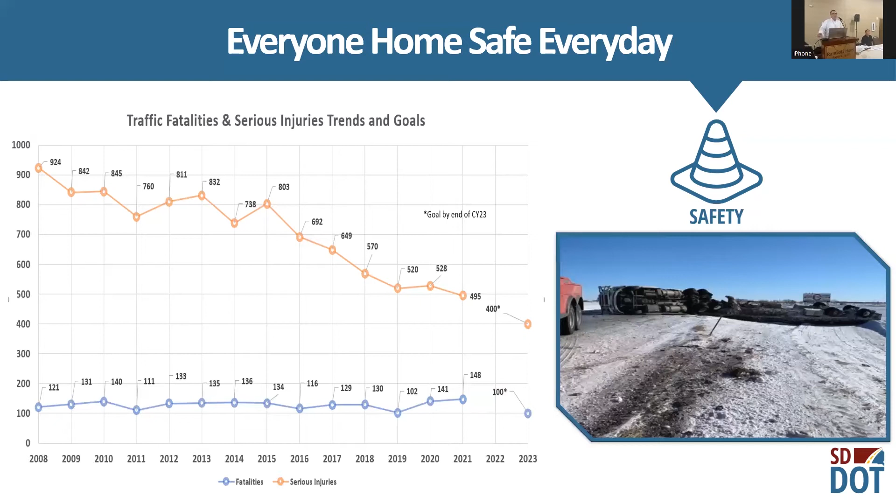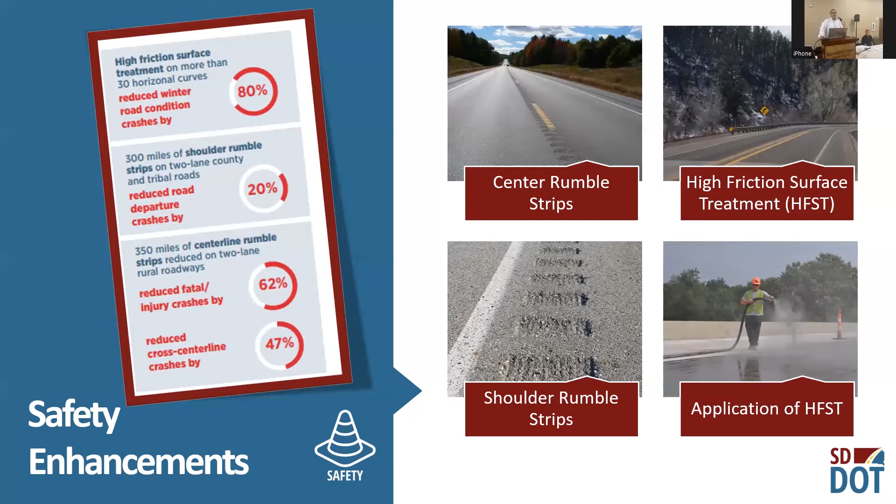We have 2 seasons in South Dakota, right? We have road construction and we have winter, and that's essentially what we're dealing with. So during those winter times, what's a tool that we can use to make sure we're getting to our destination safely? I sincerely hope you're using the 511 app. We can also use it for construction. As you use that app, you can plan for that trip. You know the construction's coming up, and you can actually plan for how long you may be delayed. Again, a great opportunity for you to engage and ensure you're getting your family or yourself there safely.

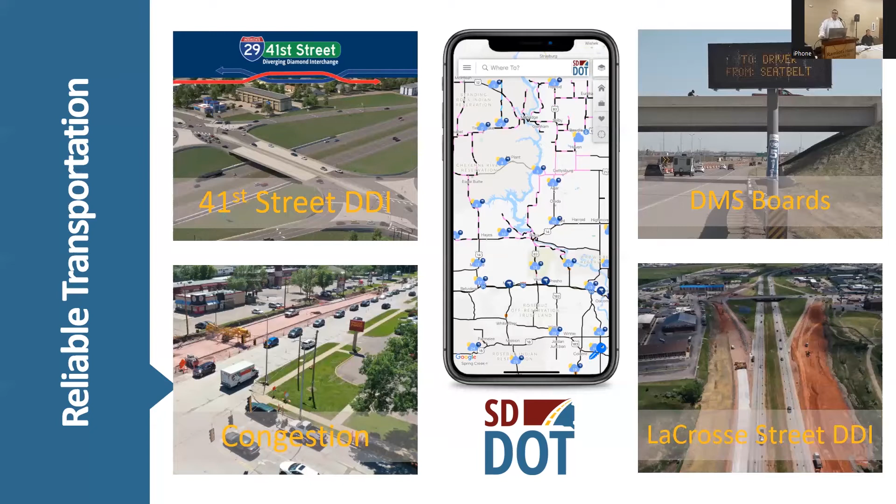The Transportation Commission since 2015 has adopted the Bridge Improvement Grant Program. So for those of you with a county or city government, or who know somebody that is, have a conversation or at least ask some questions about the Bridge Improvement Grant Program.

This year alone, on average, about $15 million is put towards the Bridge Improvement Grant Program. And this year we will be putting $33 million towards it. There's a need on our local government transportation system, and our transportation commissioners have acknowledged that and increased the funding again to help make better lives for better transportation.

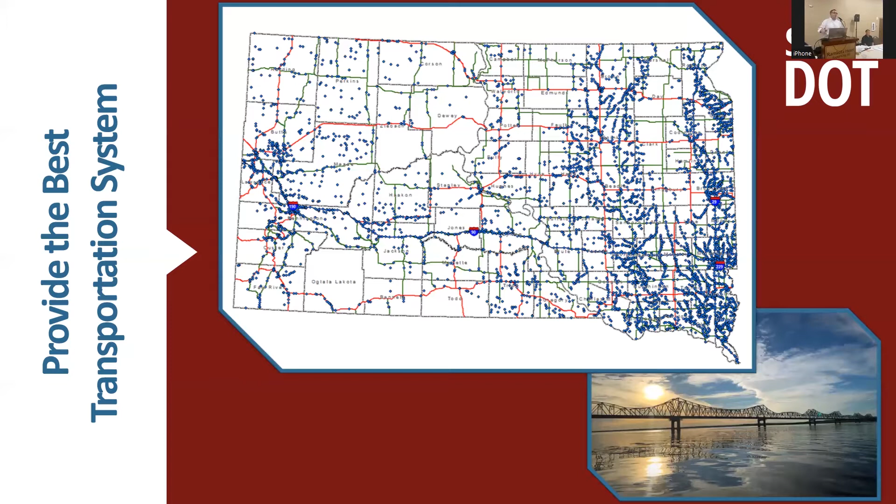Because as we all know, the transportation system is interconnected. You need that road that goes to your house to get to the interstate to get to grandma's house. You also need that road to go from the field to get your grain to the elevator.

We acknowledge that there's a large number of structures that are going to need to be replaced. When they were originally constructed, the anticipated life was about 50 years. We've employed some preservation techniques to extend those lives to 75 years, so we're seeing good conditions right now.

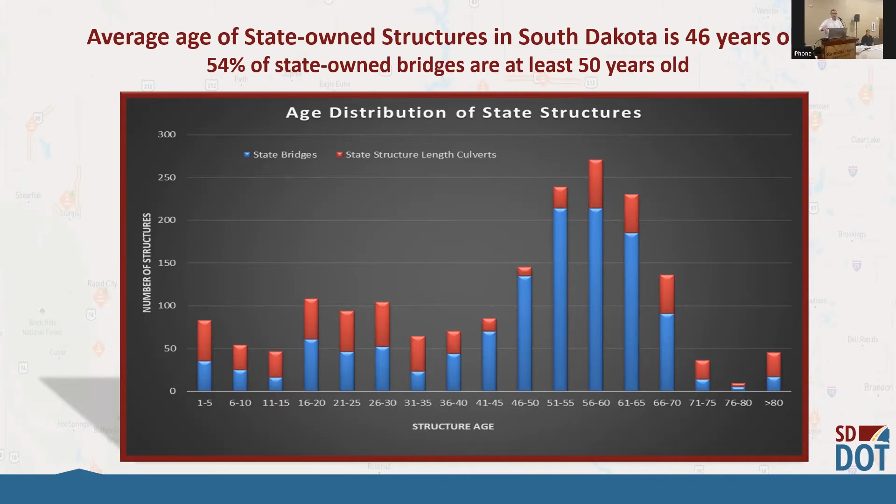In fact, 95% of our bridges are in good to fair condition on the state highway system. Very great numbers. But we know there's several structures coming due for replacement. No matter how well you preserve something, if it's being used, and our structures are, they need to be replaced. So we're moving some of our structures up again, trying to flatten that curve as we look at the bridges on the state highway system.

But we're also taking a look at new techniques. What can we do to help make those structures last even longer?

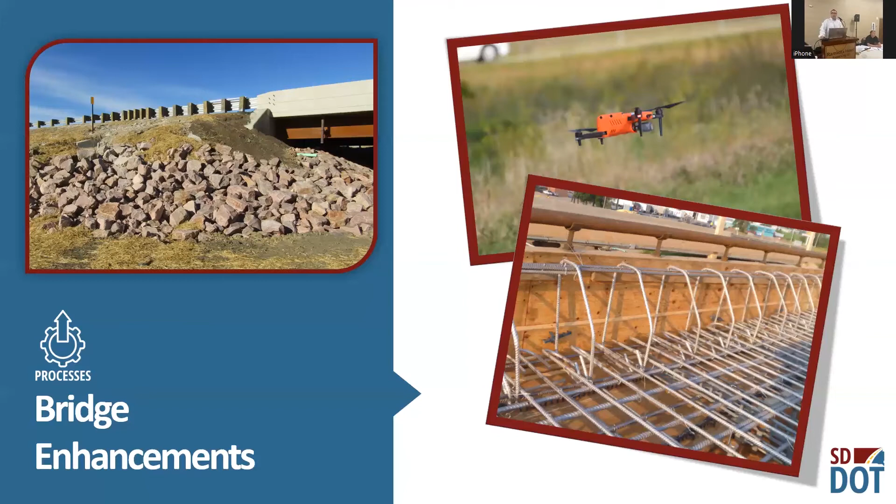We need pavements and roads as well, so just a quick briefing on where our pavements are heading and where we've been. This graph shows the historical and projected condition of our pavements across South Dakota. That black line across the bottom is our highest return on investment. If we can have 80% of our pavements in good to excellent condition, we're delivering the highest return on investment.

It's not good for us to have pavements in poor condition. Like bridges, some pavements and roads just need to be rebuilt. So those numbers are intended to be low, but we need to be able to rebuild those as well, the same with those that are in fair condition.

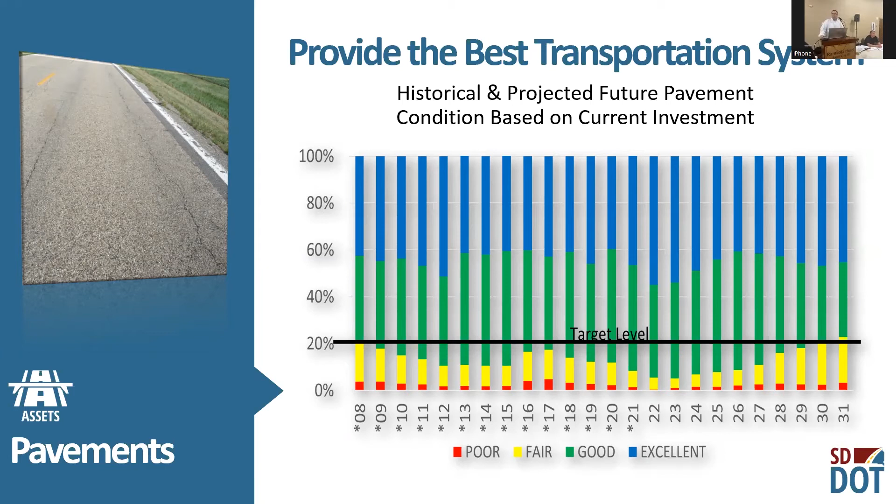To manage those pavements and extend their life, we've employed different technologies. In the upper right-hand corner is our notched wedge joint on asphalt, where the two pavement pulls come together, helping us improve density and long-term durability at that center line joint. We also have next generation concrete pavement in the lower right-hand corner, which has allowed for a better ride and easier construction. Again, new innovations trying to make better lives through better transportation.

Intelligent compaction, in the upper left-hand corner, is not a fish locator like a Helix 7, though it sure looked like one the first time I saw it. Actually, it's intended to help make sure we get good density on our asphalt by taking a look at the thermals of the pavement when the rollers go over, trying to hit it at the right time to ensure we get a good product that will last for many years. We're looking at new ways to help deliver the great transportation system we all enjoy.

I'm going to turn it over to Todd Seaman. He's going to talk a little bit about projects coming up in the region, then he'll turn it back over to me. So, Todd.

You're about a foot taller than I am.

Thank you. Good evening, everyone. I just want to draw your attention to the handout you received at the door, labeled the 2023 to 2026 Transportation Improvement Program. Hopefully you find some time over the next couple of days or this evening to peruse that and look at the very large investment the department is making in the nine western counties of South Dakota.

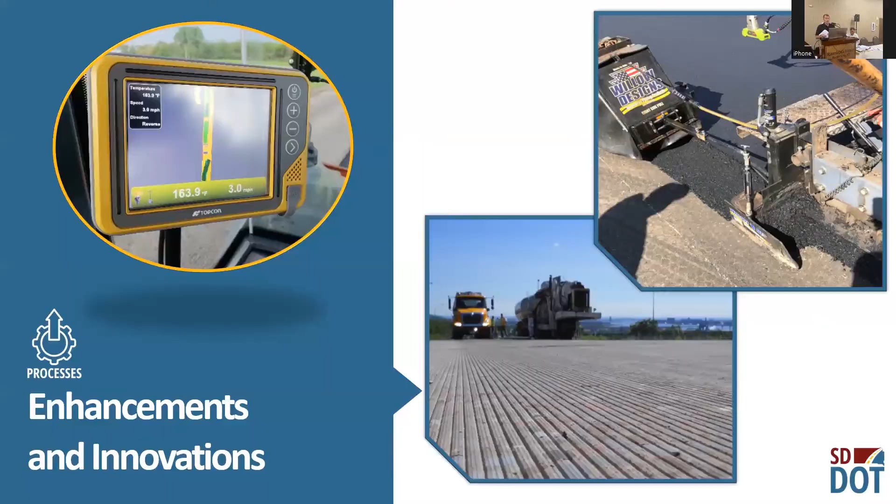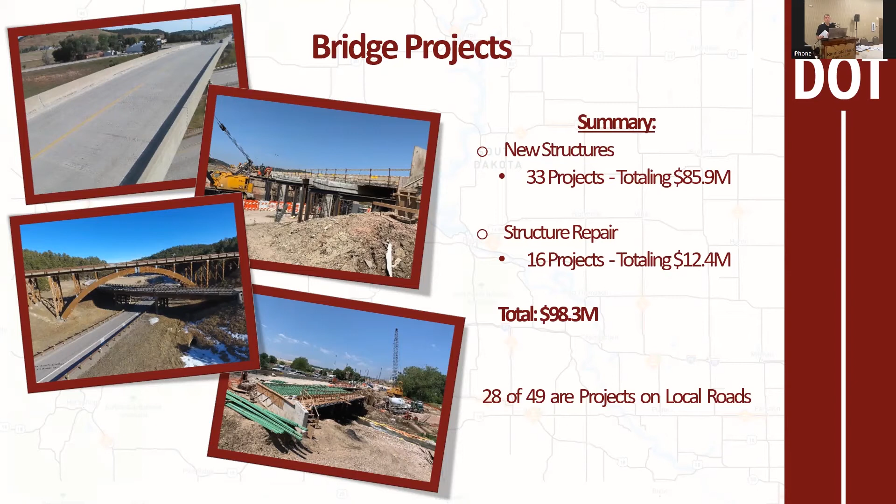One thing you'll notice is a very large investment we're making on structures in western South Dakota. There are 33 new structure projects totaling almost $86 million, and an additional 16 structure repair projects totaling another $12 million, for a total of almost just under $100 million in structure work in western South Dakota. Of those, 28 of 49 structures are on the local system - a very large investment in bridges in western South Dakota.

If you want to follow along on your handout, the very left column has an item number, which I'll be referencing. I'll just reference a couple of projects each year, starting with some resurfacing projects.

Number 27 in your handout is South Dakota Highway 73, a resurfacing project from Highway 34 north 14 miles. That's a mill and overlay project, where we mill off 1 inch of pavement and replace it with 2 inches of new asphalt pavement. The estimated cost of that project is $5.9 million.

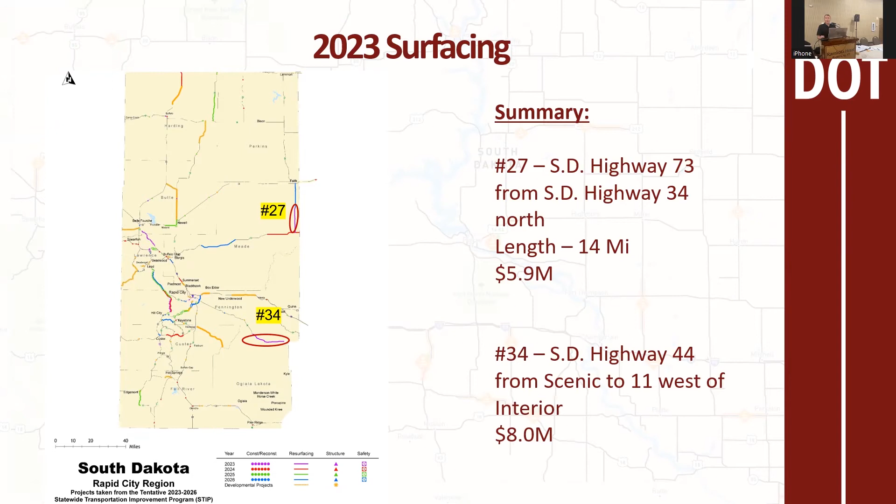Number 34 in your handout is South Dakota Highway 44, from Scenic to 11 miles west of Interior. That's a full reclamation project, where we grind up the entire asphalt surface, replace it, and then place new asphalt on top, typically 4 inches. The cost of that project is estimated at $8 million.

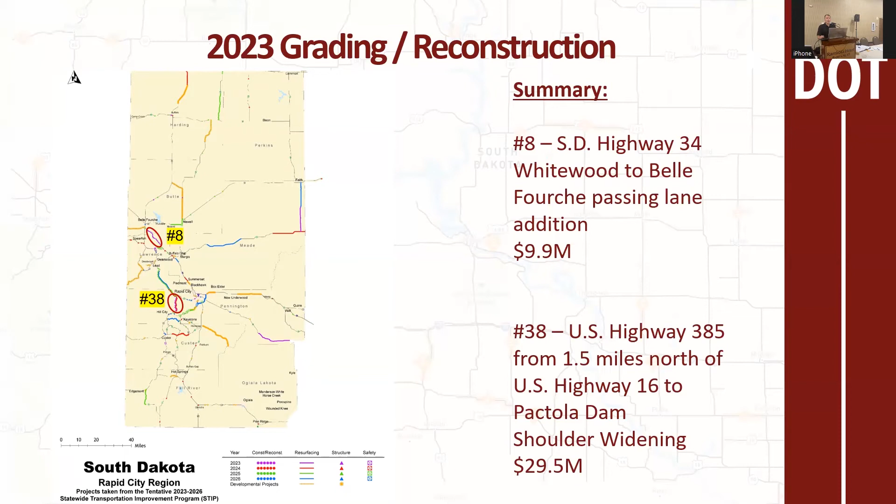2023 grading projects: number 8 in your handout is South Dakota Highway 34 from Belle Fourche to Whitewood, where we're adding passing lanes. Number 38 is US 385, running from Sheridan Lake to the Sugar Shack for us local folks, where we're doing some shoulder widening and improving some horizontal curves. That's the first of 3 projects on 385 I'll reference tonight. The cost of that project is $29.5 million.

2024 surfacing project, number 90 in your handout, is US 16A, basically through Custer State Park. That's a 12.8 mile project, estimated cost $5.4 million. That again is a mill and overlay project, where we mill off that top inch and replace it with 2 inches.

Number 95 on your handout is US 85, from Ludlow to the North Dakota state line. That's an 8 mile project, and again a total reclamation project, where we'll grind up the entire surface and replace it with new material. Estimated cost of that project is just under $10 million.

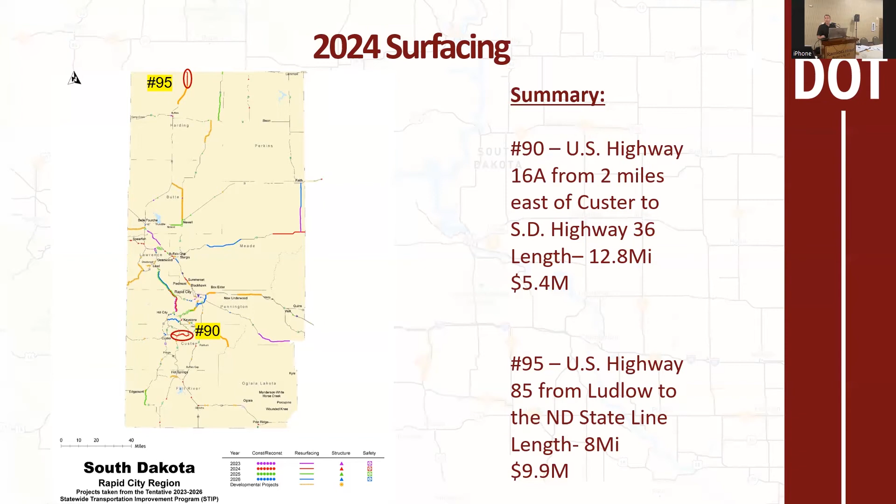2024 grading projects, number 102 in your handout, is on I-90, exit 44 to 48. We're going to reconstruct that section of highway and also replace the exit 46 fill. Still tracking for 2024 there. Estimated cost of that project is $63.4 million.

Number 115 in your handout is US 18 in Pine Ridge. That project runs from just east of South Dakota Highway 407 to the hospital intersection. Estimated cost of that project is $8.6 million.

Get the right button here.

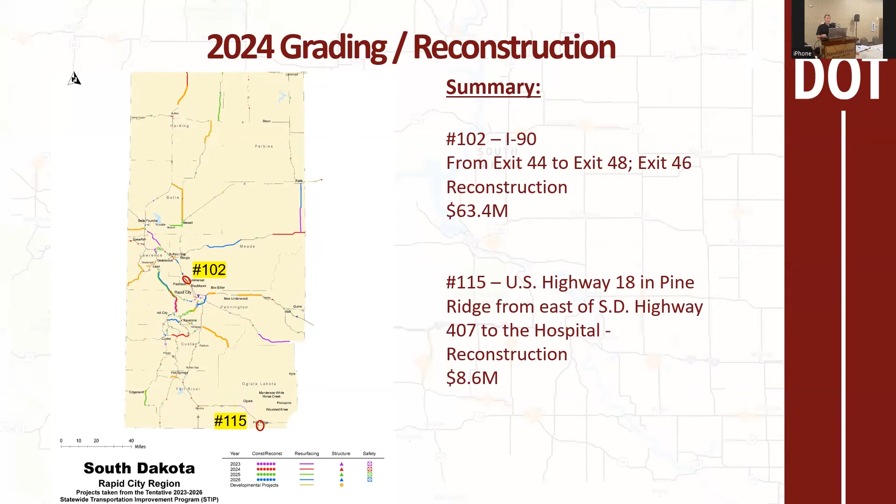2025 surfacing projects. Number 162 in your handout is South Dakota 79 from South Dakota 20 north 15 miles. Again, that's a mill and overlay project, and the estimated cost of that project is $6.5 million.

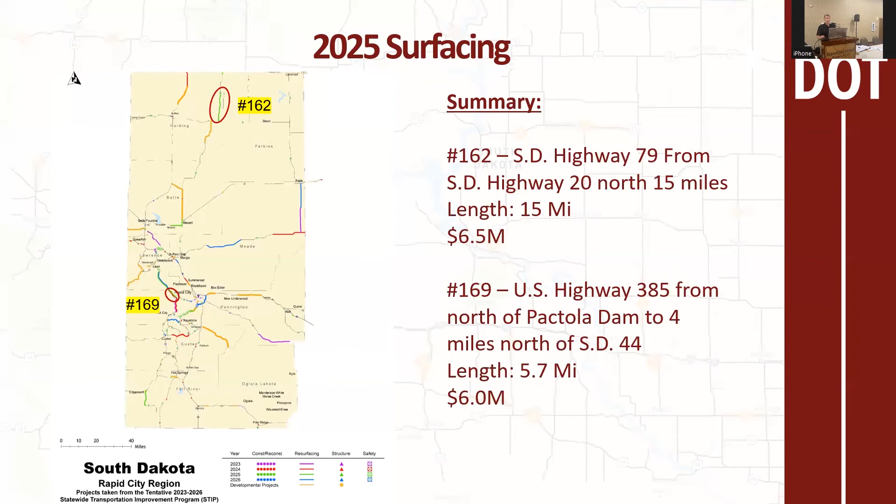Number 169 in your handout is another US 385 project. That project runs from the Pactola Dam to Sugar Shack. Again, we're adding shoulders and straightening out the road, improving some horizontal curves there. That's just under a 6-mile project. Cost of that project is $6 million estimated.

2025 grading and reconstruction, number 165 in your handout is US 385 from 4 miles north of Highway 44, so Sugar Shack again to Nemo Road, adding shoulders to that section of road.

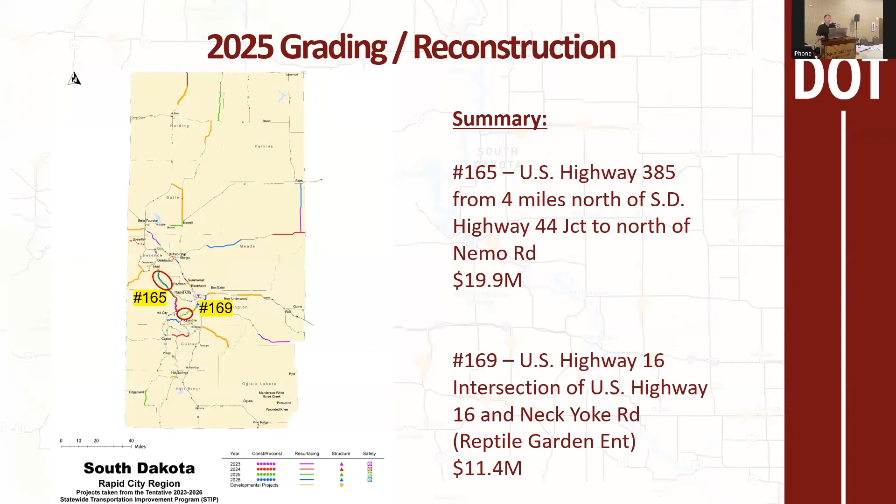Number 169 in your handout is US 16, the reconstruction of the intersection of Highway 16 and Neck Yoke Road, right down at the Reptile Gardens intersection. We're putting in a reduced conflict intersection at that location. Estimated cost of that project is $11.4 million.

2026 surfacing projects, number 217 in your handout is Highway 385 from 4 miles north of Highway 44, again the Sugar Shack to Nemo Road. That is the last surfacing project on that section, on the reconstruction of all of Highway US 385. Estimated cost of that project is $14.8 million.

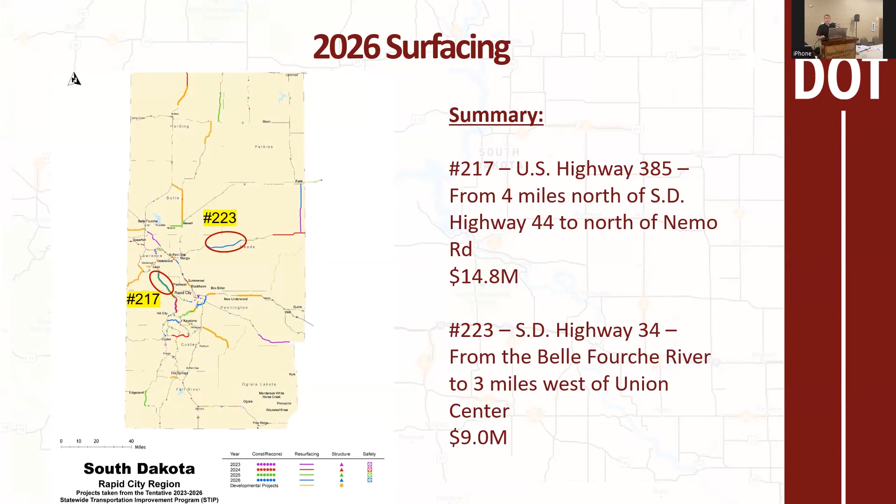And number 223 in your handout is South Dakota 34 from the Belle Fourche River, 3 miles west of Union Center. That is a $9 million project, again a mill and overlay project.

2026 grading projects, number 215 in your handout is US 16 from basically the main drag, Mount Rushmore Road in Custer, up to the Forest Service office or Buckhorn Loop. That's a complete reconstruction project, new concrete pavement, sidewalk, roadway lighting. The estimated cost of that project is $21.4 million.

And then number 233 in your handout is the intersection of US 16 and US 16B, which is at the old water slide corner. We're going to reconstruct that intersection and put in a new interchange. Estimated cost of that project is $36.8 million.

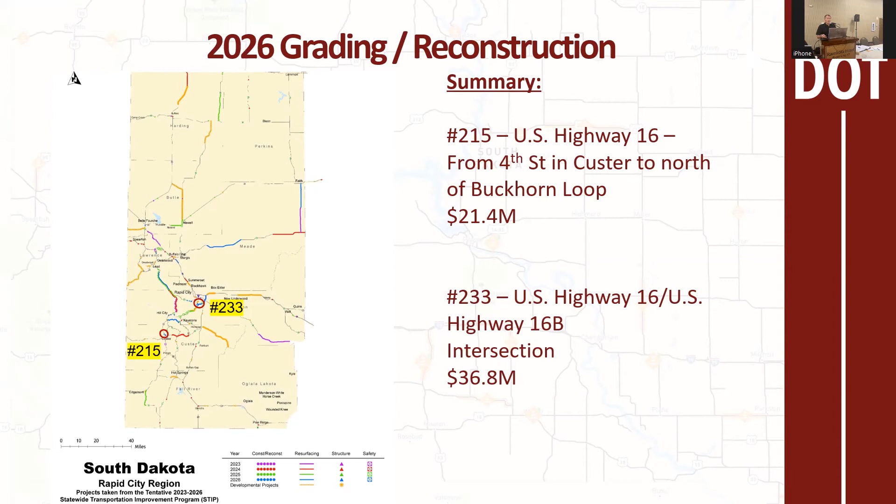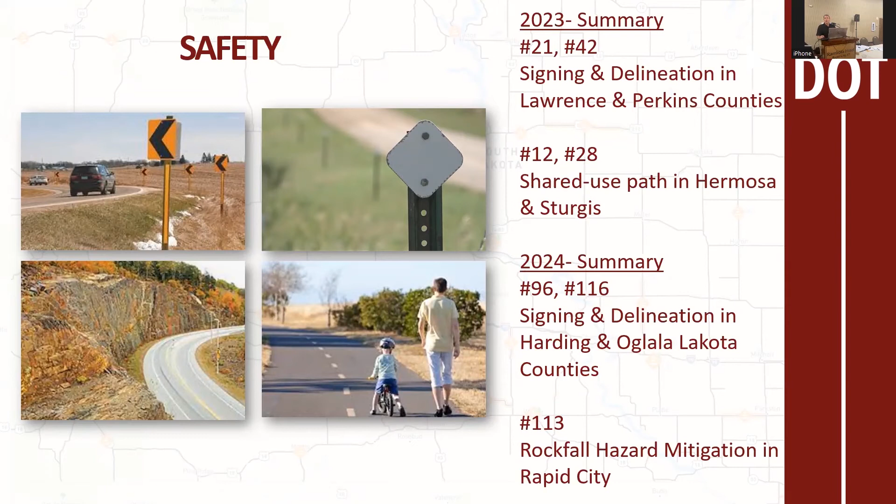As Mike pointed out in his presentation, there are some standalone safety projects in your handout. As you go through that, they range from shared use paths, signing and delineation on local roads, some high friction surface treatment. So as you go through, you'll be able to pick out some of those standalone safety projects where we're just trying to improve one of the assets on that particular section of highway to improve safety. So if you have any questions on any of those projects, DOT staff will be here tonight to answer any specific questions.

And now we'll get to the most important part of the meeting, your comments. Mr. Bean.

Thank you, Todd, and thanks again for coming here tonight. We're getting to the point where we'd like to get some public testimony. What we'll have is Mr. Larry Dean in the back, he's got the microphone in his hand. If you'd like to make a comment, please raise your hand and then introduce yourself, please, and who you represent. We are recording this, and this is for the record. This will be provided to our Transportation Commission along with the written comments as well. If you don't feel like commenting tonight on the microphone, again, you can provide written comments. Maybe you'd like to have a conversation afterwards.

If so, I just also want to introduce John Matheson from Belle Fourche, he's over there, Tom Horan, he's our operations engineer, Rich Zocker with Custer, and then Mike Carlson with Rapid City. So if you have a specific project in one of those areas, they're great resources for you as well.

So with that, let's go ahead and get started here tonight. And again, if you'd like to make a comment, please raise your hand and Larry will bring you the microphone.

I know we had one online, do we have one online, Levi?

Question is, are the cost estimates in the program based upon historical or inflationary rates? Has it been adjusted over time? Haven't seen inflation like this in about 40 years.

Yeah, great question. Generally, we've seen some pretty significant inflation, just like everybody has in everything that they're doing. About 35 to 45% since pre-COVID has been fairly normal for our inflation, but we do update our estimates every year before they're let, so we're trying to stay on top of the market.

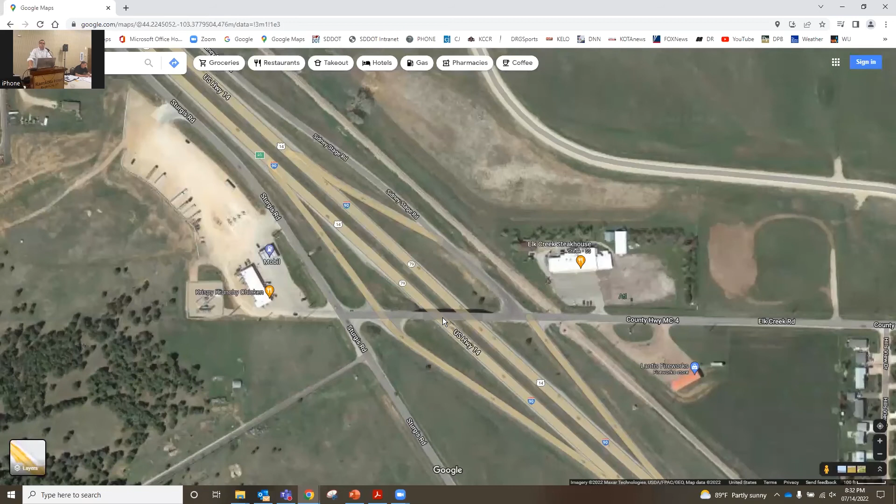But we've got a new truck stop that's expanded down there, and with the completion of exit 44, a lot of those trucks are taking exit 44 to go to the truck stop. So we're seeing semis going through our town at 40-45 miles an hour down a road that has no shoulders. It's got a barrier on the left side, and we would really like to see some consideration given to expanding that right of way back to what it used to be before the state took it for the interstate.

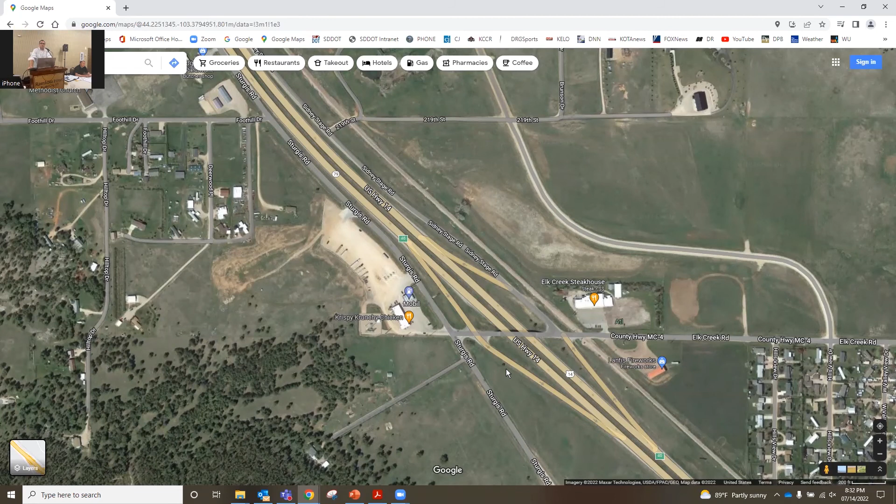We know there's 180 feet because we measured it today. There's 180 feet of blank space from the main line of the railroad to the shoulder of the westbound lane of the interstate. We were told when they put the frontage road in that the interstate would be moved over. That's why they took the frontage road out on the east side of the interstate - I can't keep track of north and south.

But when they took that out, they were supposed to move the interstate to the east in that section, and they're still going to do that. We'd like to see them move it a little further so that we can get our full right of way back, so that we could then have 3 lanes going through town.

To where if a truck is coming down and somebody's backing out of one of the businesses on the street, they would be able to have some chance of not killing them, because we're looking at T-bone accidents happening there. The speed is excessive, visibility is bad.

We bought some land from you guys, Todd. We'd be willing to give that land back to the railroad if they wanted to move that siding they've got in the center of town up north. It would provide better access. They wouldn't be driving over the main line of the railroad to get to their siding, and it might be a good solution. But we'd like to visit with everybody about that.

Mr. Secretary, we think it would be a good solution to talk with Surface Transportation about why we have this siding. The trains come through blowing their horns 3 or 4 times a day in the center of town, because the siding is on the interstate side of the mainline. We'd be willing to give that section we bought from you back just to get that siding out so we could widen our frontage road through town. Thanks for your consideration, and I'll talk with all of you more about it.